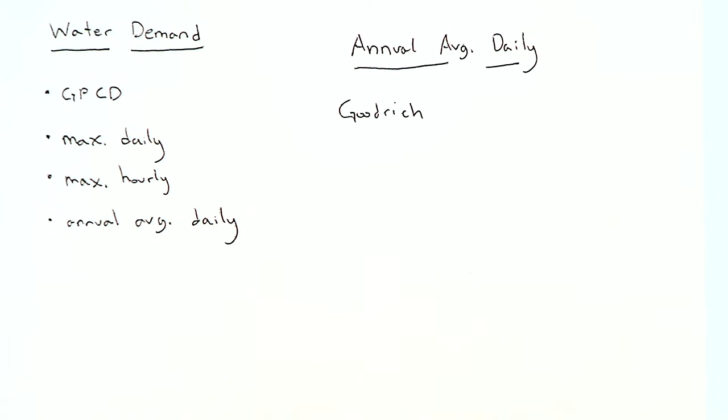For annual average daily demand, there's a very, very famous equation called the Goodrich equation, which is a very good estimate for maximum usage. Not for average, but for maximum usage. So the Goodrich equation tells me that the percentage of the annual average daily usage is equal to 180 divided by time in days to the 0.1.

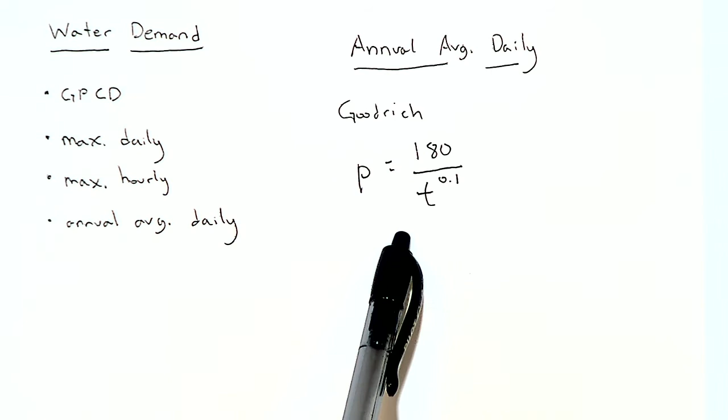What that means is that I can input a time. Let's say that I want to determine how much water is going to be used in 6 hours. I can input 6 hours here, and the number that I'm going to get is essentially going to be the percentage of what the average daily usage is. Okay. This equation is very helpful, and I would say it's very useful. I saw it when I was in college, and I also saw it again when I graduated and started working. So it is definitely an equation that is used.

Of course, you want to be careful. I've heard younger engineers say stuff like, oh, we can just figure that out with the Goodrich formula. And I think the wording there is a little bit incorrect. I would say we can estimate that with the Goodrich formula. We don't actually get real values, right? We just get estimates. Now this P is going to be a percentage, okay? Which means that the Goodrich formula really only helps us if we have a reasonable estimate of what the average use would be. And again, you can get that reasonable estimate with neighboring or similarly sized cities.

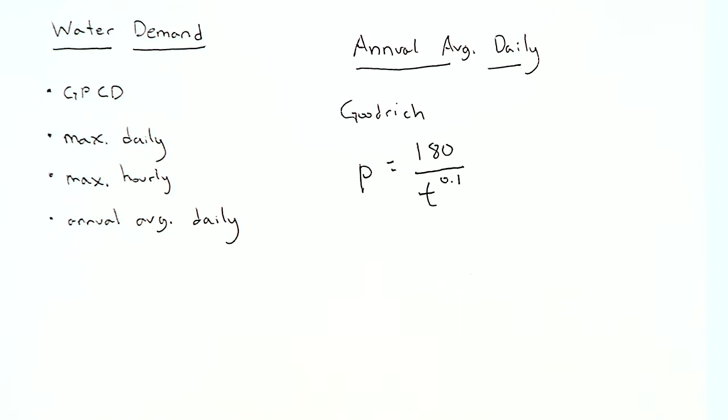The equation is valid from 2 hours all the way to 1 year. And by the way, sorry, T is time in days. I said hours earlier, it should be days. So the equation is valid from 2 hours all the way to 1 year. So 2 hours would be 2 out of 24 days, and 1 year would be 365 days. You want to be careful because this equation doesn't really account for firefighting needs. So that's a different thing, right? So typically the results that we get from this equation are for water that people consume, not necessarily for firefighting needs, but it's okay.

The maximum hourly usage can be compared to the maximum daily usage here. So for example, if I want to figure out what the daily usage would be, all I have to do is insert 1 day into this equation, and the daily usage is about 180% of the annual average use. So what this equation assumes is that the maximum daily usage is about 180%. So that's like 1.8 times what the average use would be.

I'm not really going to give you too many problems to work with this equation. I do want to try out some examples from the textbook just so we can get used to them. But I want you to be a little careful here because we're looking at a lot of statistical equations and a lot of estimates. These are not equations that I would recommend that you just take a number and punch it in without actually knowing what you are punching in. So we're going to do an example from the book, and hopefully that will give us enough math practice for this equation. But other than that example, related to this class, I would refrain from using it unless I tell you to. Okay? Because it is something that you want to be careful with.

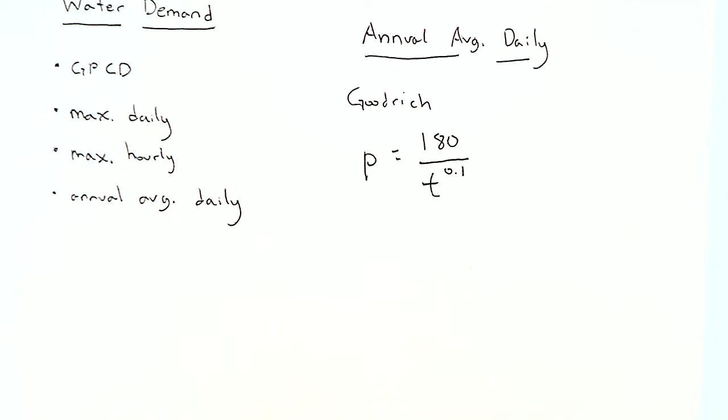I hate to sound lazy, but a lot of what we're going to learn does come with experience. So a lot of times we'll have 2 different methods, and I just won't be able to give you a list of reasons why this method is better than this one, unless it's definitive for one project. So for example, I have 2 methods. I can tell you which method would be best for one project. I can't really tell you which method would be best for all situations.

And unfortunately, a lot of that comes with experience. My experience is mostly in the stormwater side. On the sewage side, I do have water supply experience as well, mostly in urban areas, some rural experience. But if you're working on a project that's completely outside my scope of experience, I just won't be able to tell you, right? Because I don't know what that would look like. I could read about it, but I would rather actually tell you stuff that I know about instead of just read about it.

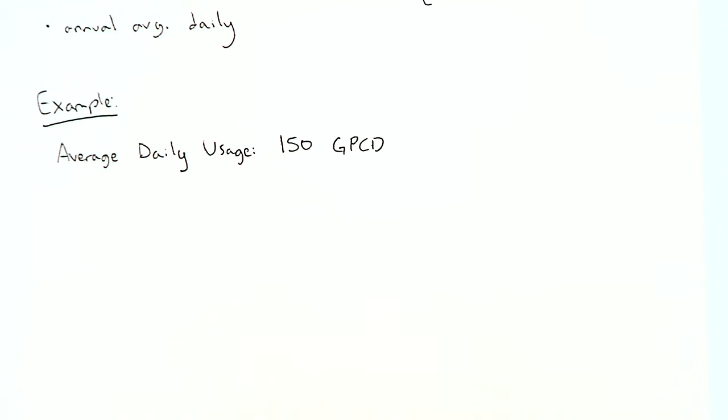All right, let's try an example. This is from the textbook. Let's say that the average daily water usage in a city is about 150 gallons per capita per day. And I would like to know what the maximum hourly demand in that city would be. I'm gonna give you some additional data. We find from statistical analysis that the maximum hourly usage is about 1.5 times the maximum daily usage.

That's what we found. So given that information, I would like to figure out what the maximum hourly demand is given an average daily usage of 150 gallons per capita per day. We don't have any data for this region, so we're gonna have to turn to some estimates. I would say let's go to the Goodrich formula to estimate. The Goodrich formula tells me the percentage, right, of the average daily, okay? So in this case, I write down my Goodrich formula.

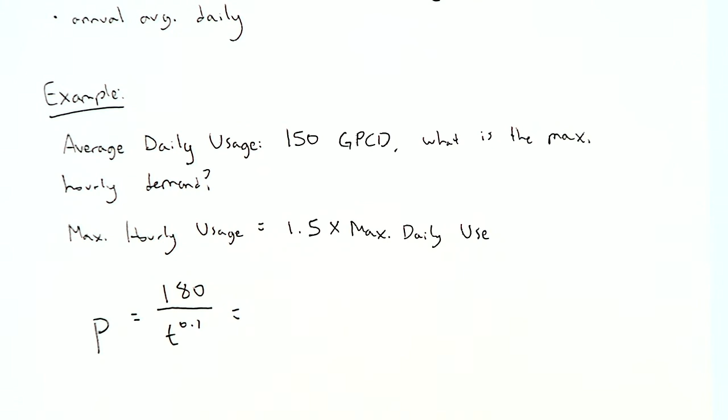And I am looking for maximum hourly demand, and I know that maximum hourly demand is 1.5 times the maximum daily demand. I can't find the hourly demand here because remember, this is only valid from 2 hours and up, right? It's not valid for less than 2 hours. But I can find the maximum daily demand. So then, what would I input here if time is in days? Okay. So what does this give me?

180. Okay. What this tells me is that the maximum daily use is 180%, right, of the annual average use. That means that the maximum daily use is going to be 180%, that's just 1.8, times the average daily use, which is 150 gallons per capita per day. Punch that into your calculator. That should give you a maximum daily use of 270 gallons per capita per day.

And from our previous knowledge, we know that the maximum hourly use is about 150% of the maximum daily use. So that's 1.5 times my 270 gallons per capita per day. Punching that into your calculator would give you a maximum hourly use of 405 gallons per capita per day. Remember, this is gallons, that's volume. Person is just person. And then day is time. So this is actually a flow rate, right? It's volume over time. Okay.

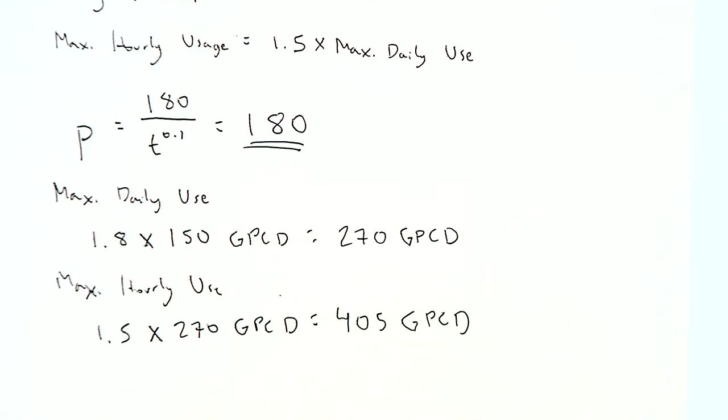Go ahead. So would you have to increase the pressure in the system to account for it? The thing is that obviously you can't just increase the pressure at a certain time, right? You need to design for that pressure entirely, and that's correct. I think you bring up a good point that I'd like to talk about. You have a building that's 10 stories high. Of course, you're going to have to design so that your water pressure can reach all 10 stories because you have taps and bathrooms on all 10 stories.

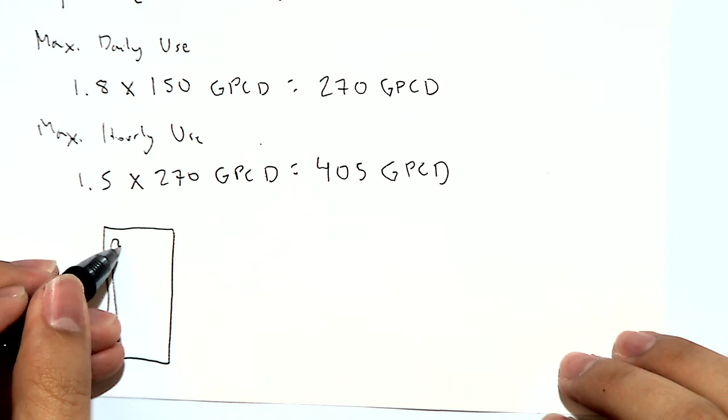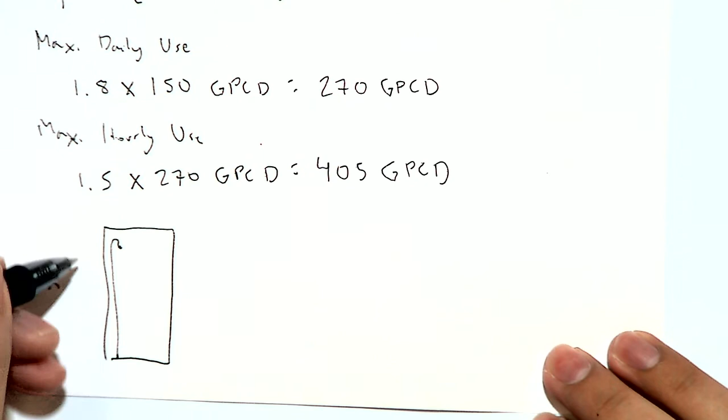You may recall from fluid mechanics that we have a hydrostatic pressure equation, and we know that pressure is just gamma H. So if you know the H, you multiply that by 62.4 if you're in English units, and you figure out the pressure needed to take water all the way up to this point. Now there's a little bit more that you need to do. You need to consider energy losses, friction losses, and you do that with the energy equation, which we've already covered in fluids. However, as long as you can get water up to that point with a certain additional pressure, you should be fine.

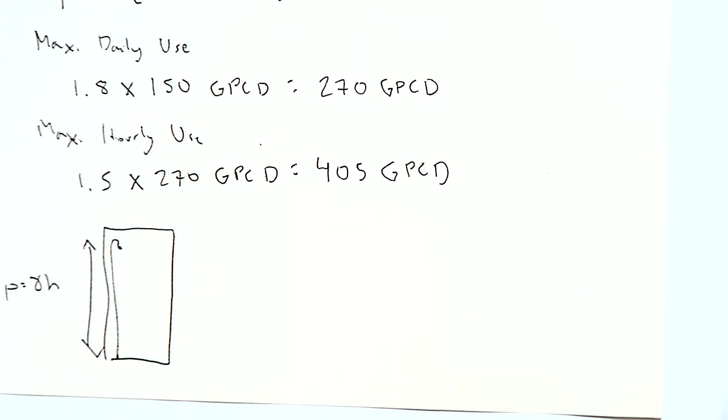Here's the problem. When it comes to fire demand, you're going to have to get water up to that point in much larger volumes than your tap water would be, which means that the pressure you need to design for is actually going to be larger. Now I'm going to go back to your point. I designed for a really large pressure so that I can convey the required flow rate up to the point I want. What happens if I go too high on my pressure? What happens to my plumbing system? It can burst, right?

So I also need to make sure that my pressure does not overwhelm my plumbing system. Most cities don't have the luxury of having a separate water supply and firefighting system. They're all part of the same system. So we need to design our system in such a way that we provide the appropriate pressure without overwhelming the plumbing system of a building.

When I was in college, we did this project for a class where we were given kind of like a neighborhood, and we had to do all these different designs: pressurized systems, tap water, firefighting water, all these different things. And I remember that one of the things that really got us when we were working in teams on this project was trying to come up with a good design for a firefighting system that wouldn't actually make your pipes burst.

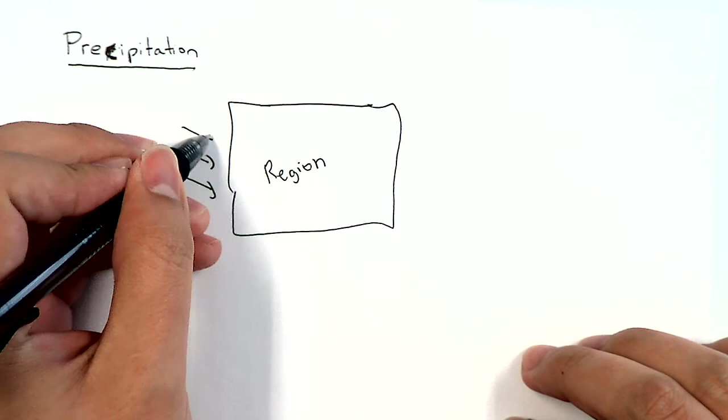We're going to have our region, and we are going to have some influx of flow. Where do you think this influx comes from? Let's say you're studying a region, let's say you're studying Marietta. Where does the influx of water come from? Rain. Good. We have rain. Within the region, rain can take many forms. Surface water, groundwater, we can capture it, we can move it around, we can use it, but it comes to

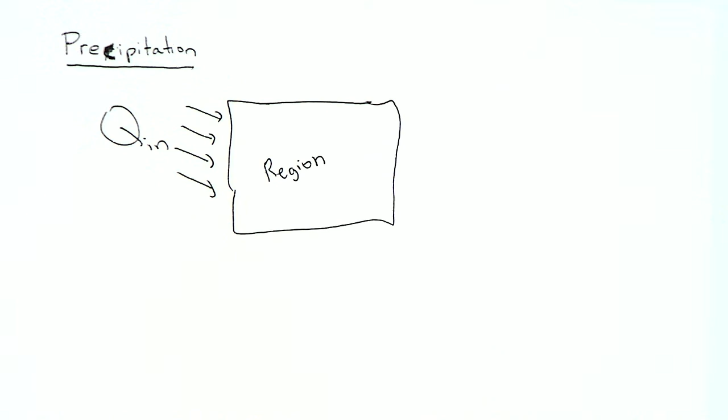us as rain. The Chattahoochee River passes through a lot of cities. One of those cities is Sandy Springs. Now, we typically don't use that section of the Chattahoochee for water supply, but let's just say we did for a second. In that case, we would have an influx from rain, but also another influx from the Chattahoochee River, which collects rain that falls outside of the region and brings it into our region. Okay, so there are different sources of influx and inflow.

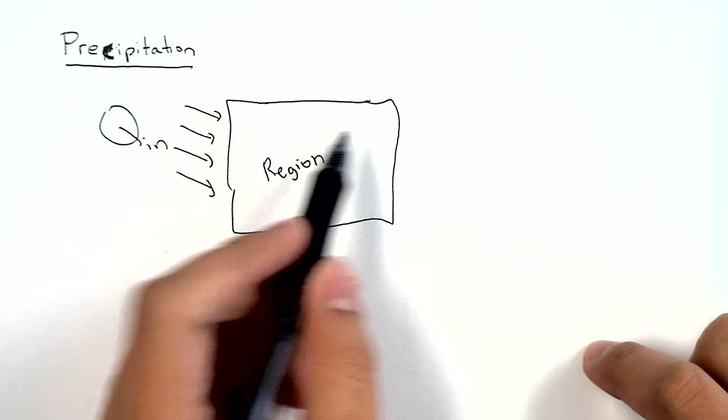But the important thing is that if we study our control volume, we can say, well, water can come in, which means that it increases our supply in the region, and then water leaves. It leaves to the city, it leaves to the houses, it leaves to the people that are using them, it leaves for many reasons, okay? And of course, if we look at this in the form of a control volume, we know that as long as the influx is greater than our outflux, we won't have any water needs, right? We'll be able to meet our demands.

All right, so if Q in is greater than Q out, we won't have any needs, we'd be okay. If Q in is smaller than Q out, we have problems, right? We're gonna have a need of water.

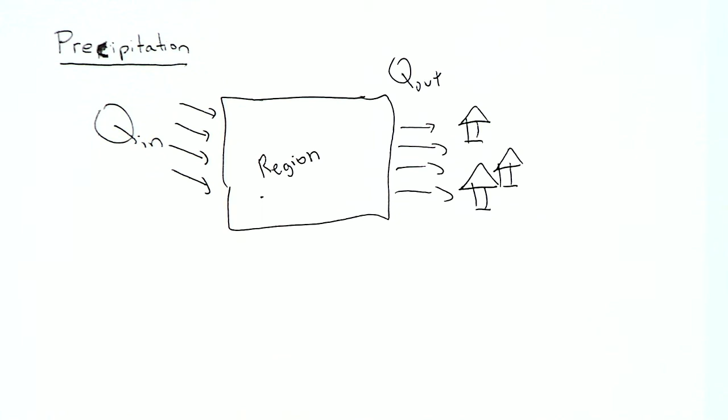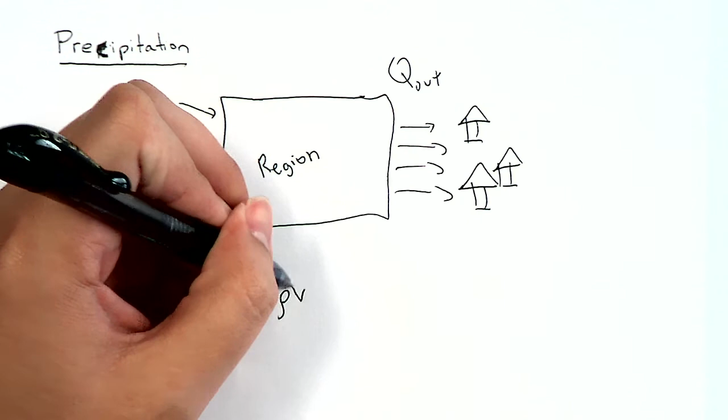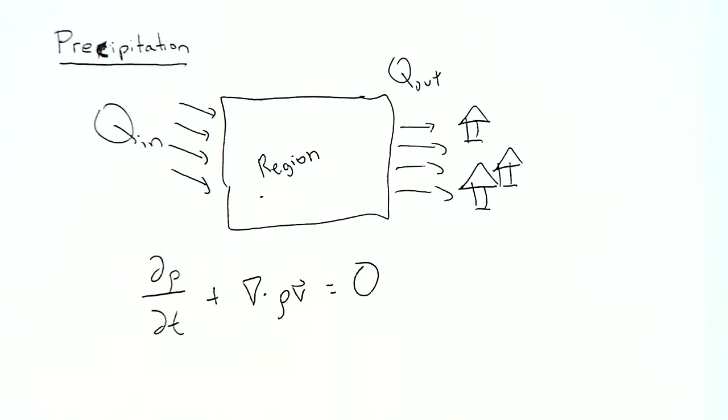In order to study how much water is actually in a region, we're gonna have to apply the continuity equation. You may recall this with a little bit of fear, but this was the continuity equation that we studied in class. What that equation told us is that essentially what comes in must come out, and if it doesn't, that means that the density of the fluid is changing. Now, this is a hydrology class, which means that we're going to take this continuity equation and we're going to apply it to water.

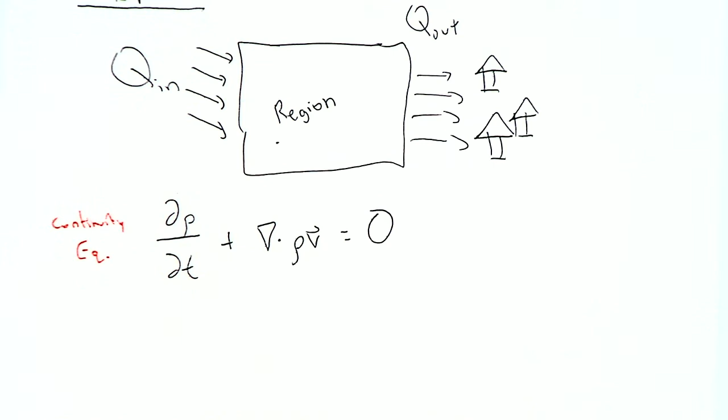Josh, I'm going to have to use you again. When it comes to water, which is a liquid, what can we say about the density of liquids? Or specifically about the change in density in liquids? That for the most part it does not change. Exactly, right? When we're dealing with liquids, normally, unless we're looking at massive temperature changes, our densities will not change. So if my density doesn't change, then what's the derivative with respect to time? Zero. Good.

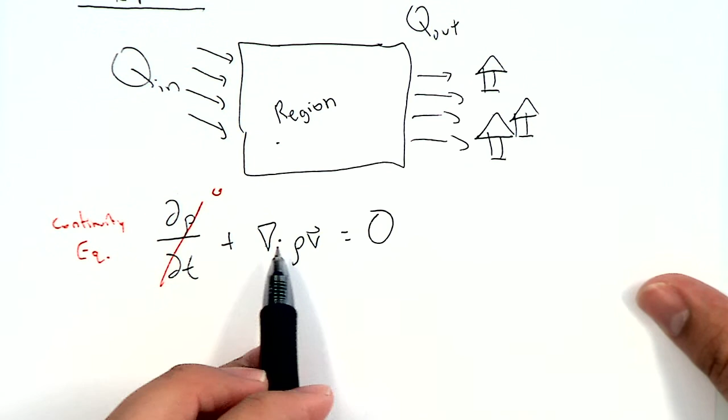Also, if my density doesn't change, then I can take it out, right? It's a constant. I can take it out of this divergence. And then I end up with this nice little simplified form of the continuity equation.

eyes and expressions. Yes? What does the upside down triangle mean? It's a Nabla operator. So it's a gradient operator. It just gives you the derivative with respect to all spatial dimensions. Now here's a good part for all of you. We won't have to deal with the equation in this way in this class. We're actually going to keep simplifying it until we get to something a little bit easier. Okay?

Yeah. Okay, good. All this tells me is that the derivative of u with respect to x, you don't have to write this, I'm just going to show you the derivatives are equal to 0. And what we can get from this, and that's the important part, is that if the density doesn't change, and these derivatives don't really change because my volume doesn't change, then we can simplify this expression into a form that tells me that the flow rate in minus the flow rate out will equal whatever the change in volume in our system is.

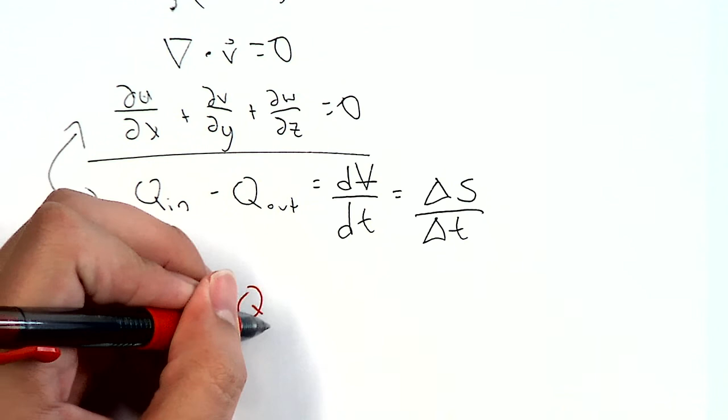I don't know what the variable will be for that, because normally most water balance equations don't include it. But you do bring a good point. When you have places with drought, you have to actually bring water from other regions. So we can call it whatever you want. I'll just call it QT. But, you know, it's just not in the water balance equation.

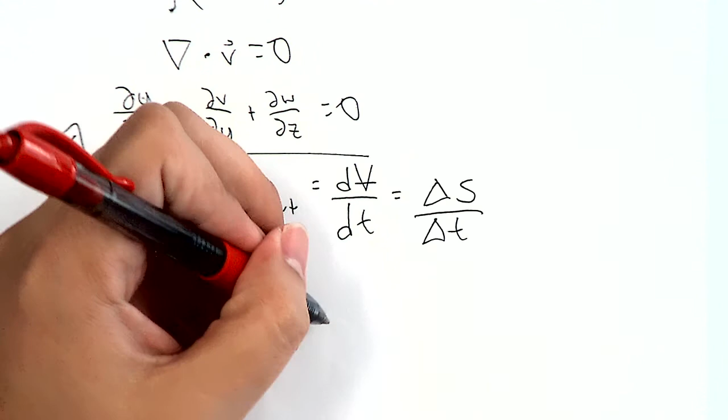Good. Any other sources of inflow? We said that water can come in through rivers. In addition to surface water, what other types of water did we have? Groundwater. Okay, so we can actually have water come into our region under the ground, right? Good. So we have groundwater inflow into our region. I think those are good sources. Precipitation, surface water inflow, groundwater inflow, and then water that is transported into our region.

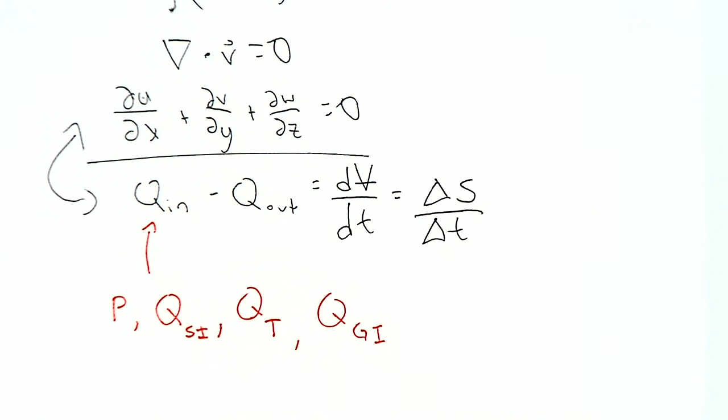What do you think are sources of outflow? So that was inflow. Now let's look at outflow. Evaporation. Can you say it again? Evaporation, good. And let's call this surface water evaporation. Okay. Yeah, can you say that again? Somebody said something. Residential. Okay, so usage, right? Just water that we use.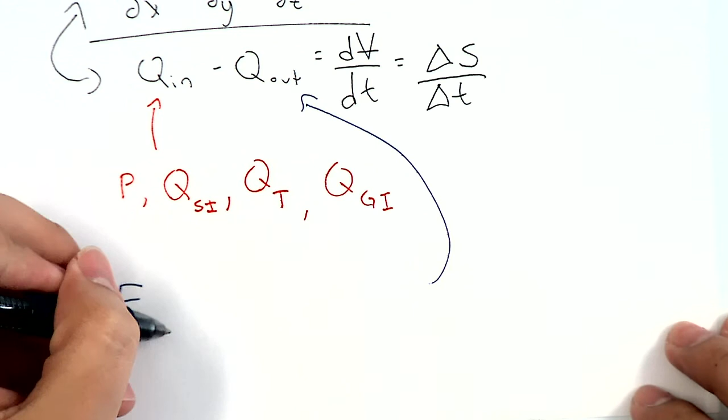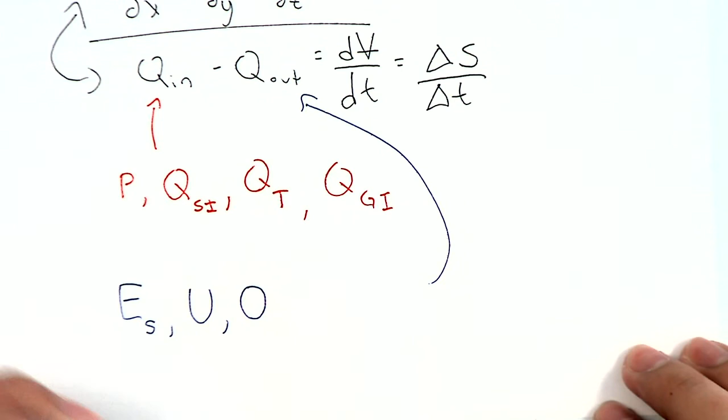And again, we can call this U for usage, we can call it whatever. These variables, every single book has different variables. So don't take these as this is the variable, okay? Really what matters is the concept, not the letters themselves. But anyway, usage. We have evaporation, water can evaporate, or we can use water, okay? Any other? You have outflow of surface water and groundwater too. Exactly, so we have outflow, so we can call it QSO, I think.

Yeah, surface outflow, good. Is water on the surface the only way it can leave our region? Groundwater. Groundwater outflow, good. Infiltration, good. Water can infiltrate as well, leaving our region by just joining the groundwater, okay? We're missing one. What are other ways that water can leave our region and go back into the atmosphere? Did we say the plant one? Transpiration, good. Evapotranspiration, good. Awesome.

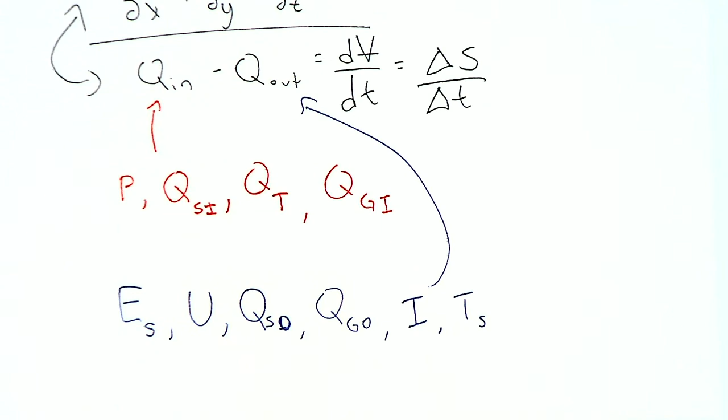So here's the thing. We started with this very complicated continuity equation, a nice nonlinear differential equation that we can solve. And now we're going to simplify it into a nice arithmetic equation where all we have to do is add and subtract things. Conceptually speaking, we're saying that the change in storage, and let's multiply everything with respect to time, is going to be equal to the precipitation plus the surface water inflow plus the transported water plus groundwater inflow

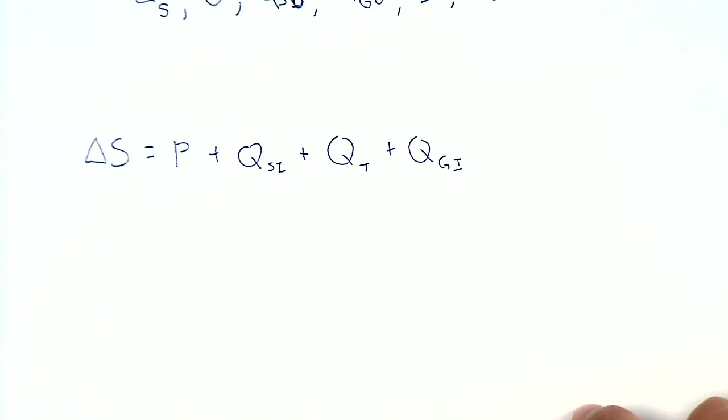minus evaporated water minus used water minus surface water outflow minus groundwater outflow minus infiltration minus transpiration. Again, these are not variables in the mathematical sense. We're talking about concepts here. We're talking about the concept of precipitation that adds to storage or removes storage.

If you ever want to use this and actually add numbers to it, then of course you need to make sure that your units match. Right now the units don't match here because I would have to add delta T to every single one of these. It's just a little bit too much. So in terms of concepts, if we understand how much water is coming in and how much is leaving, then we will know how our storage changes. If we know how our storage changes, then we know the state of our water supply system. That's called the water balance equation.

What time does this class end? 1:30? Okay, so we have enough time.

Let's go to example 2.1. It's a very simple water balance equation. And it's going to force us to deal with units as well. That's why I like this example.

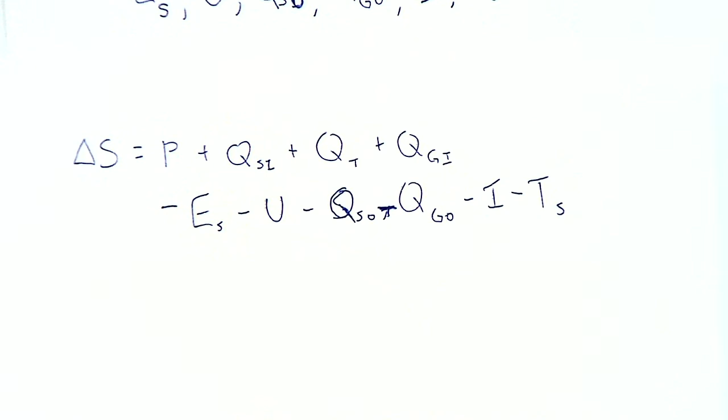All right, reading from the book. At a particular time, the storage in a river reach, a reach is just a section of a river, is 55.3 acre feet. And this is something really interesting. You always want to keep in mind that hydrologists are notorious for coming up with our own units that just benefit ourselves. So the storage is going to be 55.3 acre feet.

What is this, dimensionally speaking, in terms of dimensions? Is this an area or a volume? Volume. It's a volume, right? Because we have area multiplied by length, it's a volume. Of course, we could convert it into cubic feet.

Why acre feet? Why not just do feet cubed? I'll explain. So typically, you have big areas for regions, which are typically measured in acres, right? 1 acre, 43,560 square feet for a given depth. But then you want to measure that in terms of depth as well. So normally the acre stands for your entire area, and then your depth is just whatever.

When we talk about rainfall, sometimes I talk about it in inches acre, right? So I say, well, for every acre, there was however many inches of water rainfall. So it's just a way to kind of help us talk about things. But yeah, acre feet. And like I said, I like this problem. It's going to force you to deal with these units, okay?

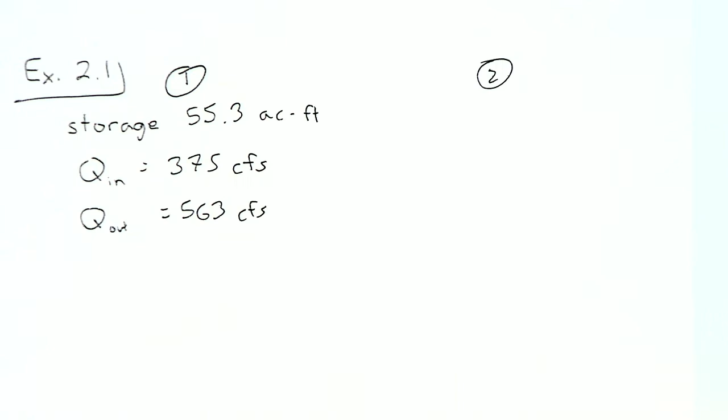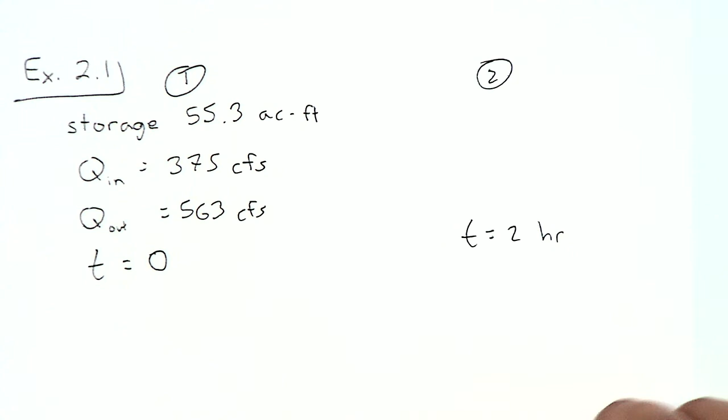And we'll say that at that same instant, the outflow is 563 cubic feet per second. Okay, that's at one instant. Let's call this state number 1. At some instant in state number 2, 2 hours later, so we can call this time 0, and we can say this time 2 hours later. At some point, the inflow and outflow are 600 for inflow, and the outflow is 675.

I would like to know what the storage is at that point. So I'd like to know how much the storage changed and what the storage is. There are obviously problems with how much data was given, which means that we're going to have to come up with some assumptions to work with that. But let's see if you can figure those out before I tell you what they are. So how would we solve this? First of all, storage is volume, but then we're given inflow and outflow in volume over time, which is flow rate. Okay, how do we know how much storage is being added?

You need to convert the cubic feet. We can do that. We can convert to cubic feet just to make things easier for us. So Jaden says let's convert to cubic feet. So our storage, I'm going to call it storage at state 1, is going to be 55.3 acre feet. There are 43,560 square feet in an acre. And if you work in hydrology, you're going to memorize that number really quickly because you're going to use it all the time. So I can say there are 43,560 feet squared per acre.

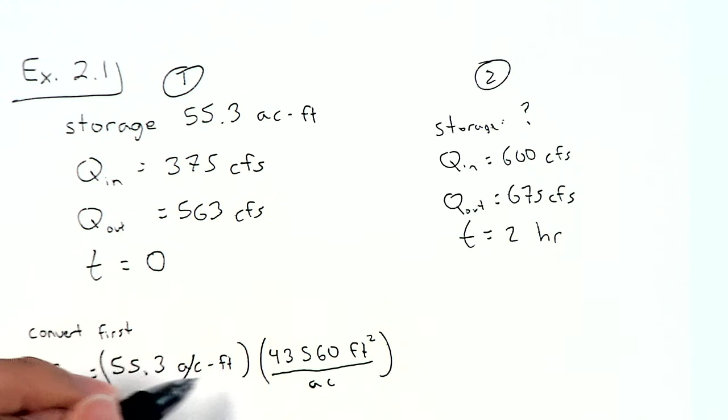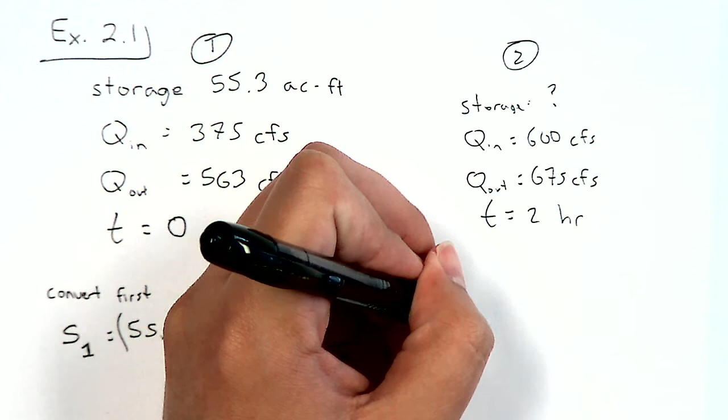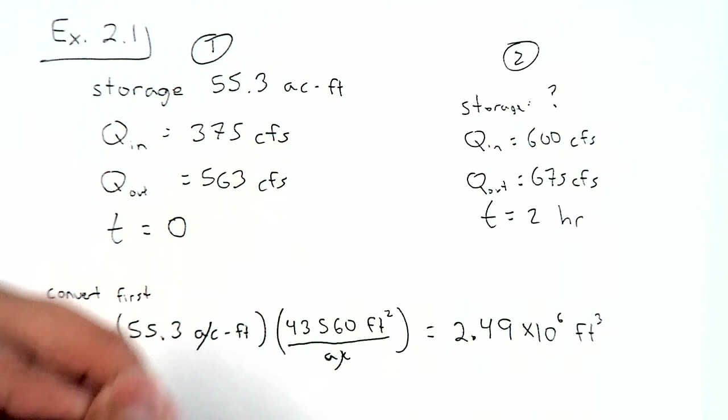How many cubic feet of storage do we have? 2,424,088,000. No, it was 2.4 million. 2.4 million? 2.49 million? Yeah, I didn't put commas in here, so I don't know. Somebody tell me the storage. 2,408,868. All right, 2.49 million, right? 41. 41. That's why you don't use cubic feet.

Yep, I hope that answered your question, Seth. Good. Awesome. So what does this tell us right now? Just let's look at state number 1 at time 0. What do we know about the storage in that river at that time? It's decreasing. Why is it decreasing? Because our out is way bigger than our in. Exactly, right? We have more water leaving our system than we have entering our system.

What about state number 2? What do we know about state number 2? It's not decreasing as much though. It's decreasing, maybe not as much. Would you expect your storage at time 2 hours to be lower than the storage at time 0 then?

Okay. Now we have a problem here. We only have two measurements. Inflow and outflow at 0, inflow and outflow at 2 hours. We don't know what happens in between. So what assumptions can we take? Could we assume that the inflow and outflow is going to be this for the entire 2 hours and then right at 2 hours switches to this? Is that a good assumption?

Why not? I believe you. I just want to know why. Why isn't it a good assumption? Realistically, it doesn't really happen, right? Okay, yeah, not very realistic. Okay, could we assume that for the first hour, this is my inflow and outflow, and then for the second hour, this is my inflow and outflow? It just changes drastically like that? Not very realistic either, right? Any ideas on what we could assume?

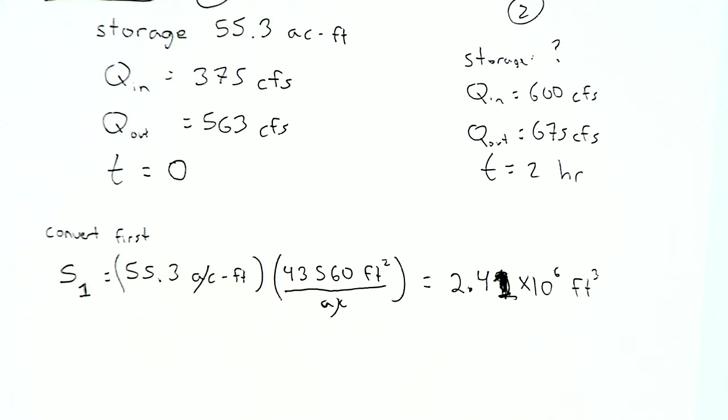So it's linear. Okay, we could assume that the inflow increases linearly to 600 CFS, and at the same time, the outflow increases linearly to 675. That's an okay assumption. And for this case, unless we have any statistical data to use, it's the best assumption. We could have better assumptions if we had more data that could point us towards that trend. But right now, we don't.

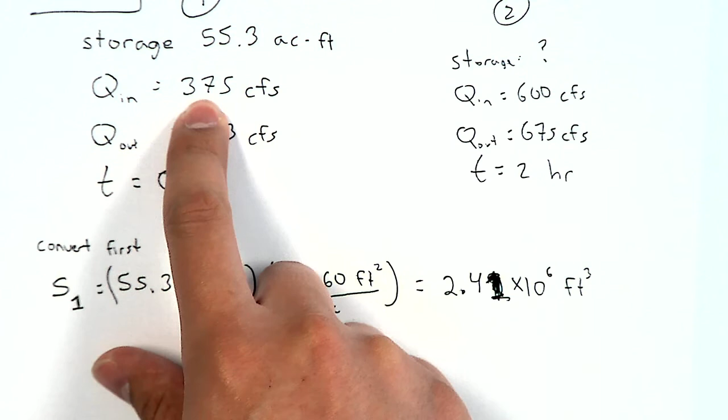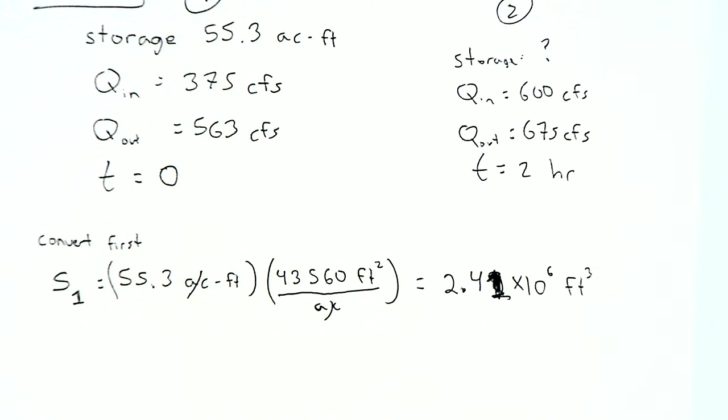So we do know how this flow rate changes. We know that inflow increases linearly from 375 to 600 CFS over the course of 2 hours. We know that outflow increases linearly from 563 to 675. I don't know why they couldn't just use round numbers. But anyway, 563 to 675 linearly over the course of 2 hours. Using just that information, can we find the change in storage, knowing how the inflow changes and knowing what the initial storage was? Yes. Yeah, let's figure that out.

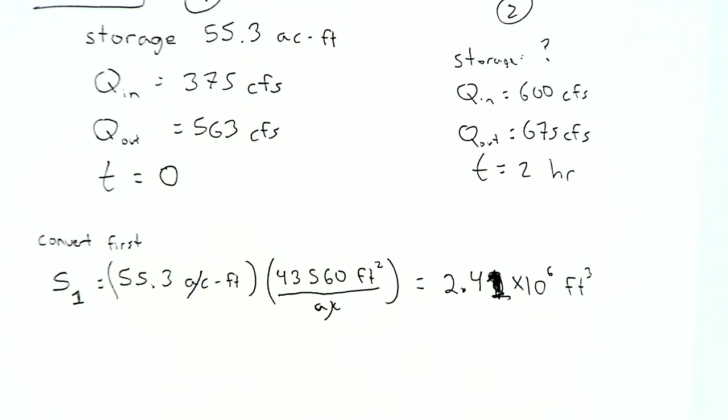So there are two ways we can solve this. We can integrate, right? We can just come up with a nice equation for inflow, which is just a linear equation, and integrate that over the course of 2 hours and get the total storage volume that's added. We do the same thing for outflow and get the total storage that's removed, and then we just add everything up. That's one way to solve this.

A second way to solve this, and maybe geometrically is a better way to look at it, is to say this is my inflow, and I'm going to plot it here. This is time, and this is Q in. We start at 375. We increase linearly over the course of 2 hours to 600. What happens if I integrate the flow rate curve right now? What does that give me?

The change in storage? Yeah, right? Because flow rate is volume over time. You integrate that, right? That gives you volume. I think we understand how integrals work here, right? Good. If we don't, I'm giving a math course next week during my office hours and will cover all those things.

So that means that the area under this curve, this trapezoid, gives me the amount of storage that is added to my system. Can we agree on that? Given that information, can we find that area under the trapezoid? Yeah. Okay, let's find it. What's the area of a trapezoid? It's the average of the two heights, multiplied by the base. All right, let's figure that out.

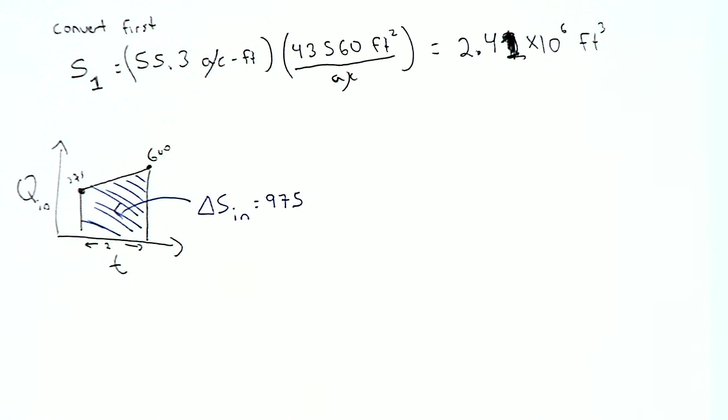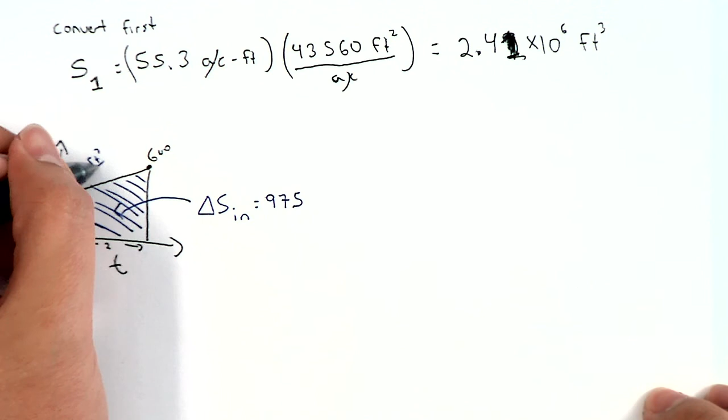975, right? All right. Yeah. And what units does this give me then? Let's look at units. What are the units of this flow rate? CFS. What's that? Cubic feet per second, right? We're multiplying it times what? What are the units of time? Oh. Okay. So what is our storage really, once we fix the units?

Nash, 4 classes with me. I'm disappointed in you. But it's okay. Well, you didn't write units on your graph, so technically. Oh yeah, try to blame me, huh? You gotta play it that way.

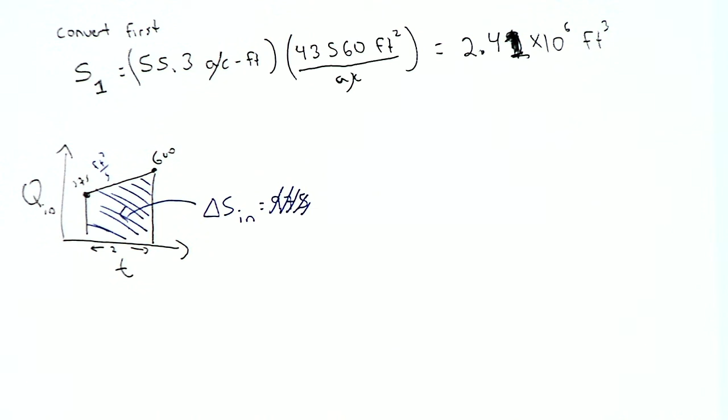The book also does this, but then the book takes a nice approach. It writes the units as CFS times hour, which is totally right. Yeah, give me the storage, okay? Is it 3.51 times 10 raised to 6? Okay, thank you. 3.51 times 10 to the 6th. Like that? All right, can somebody confirm? That's what I got. Perfect, good.

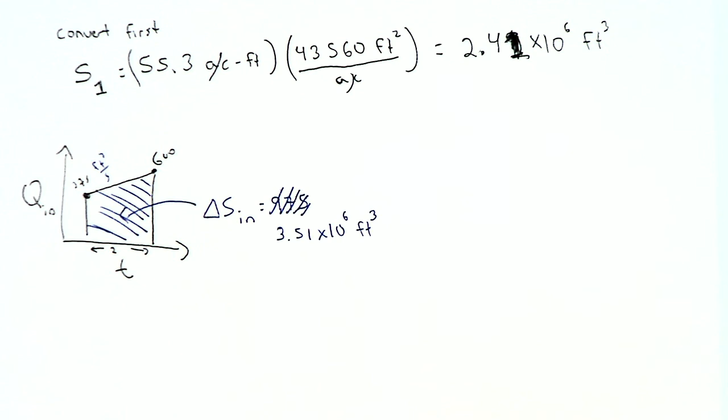So we found the storage in. Now we can go ahead and find the storage out. The outflow starts at 563. Let me write the units so Nash doesn't complain. And it increases to 675. And that is over the course of 2 hours. The area under this curve is going to give me the total volume that leaves my system.

.46. 4.4 what? 46. Thank you. Times 10 to the 6th? Yeah. Thank you. Somebody confirm that value, please? Yeah. That's right. Perfect. Finally, we go to our final question. What is the storage at 2 hours?

Conceptually speaking, what would I write here? Not the numbers, but the concept. What would this be? How do we get the storage at 2 hours? S at 2 hours minus... The main storage minus. Okay, minus main storage, okay. Plus Q in minus Q out. Q, Q, or, oh, delta? I'm sorry, yeah, that. Okay. Minus delta S out. Good. You punch those numbers in, and you should get your total storage.

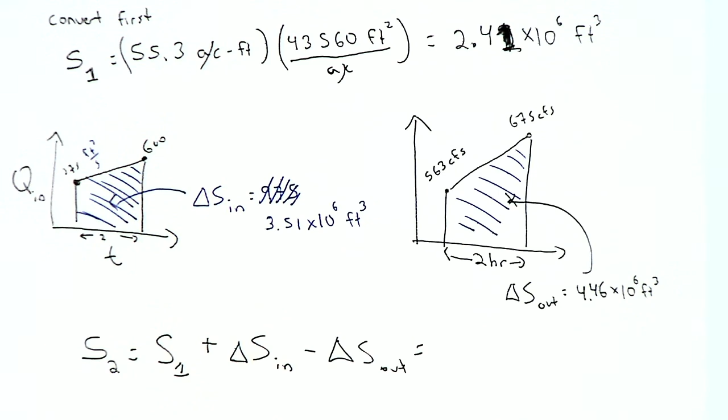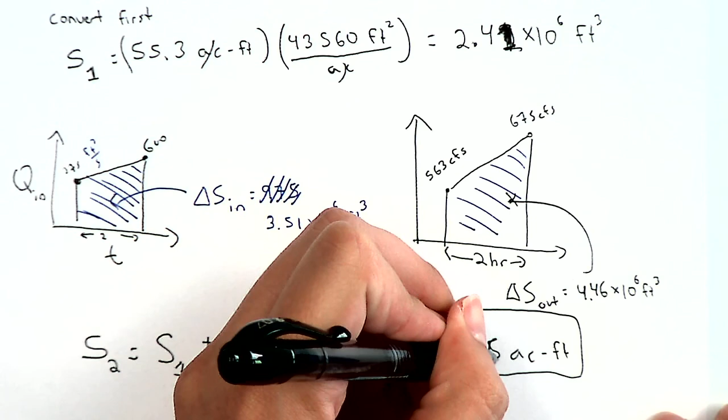And just to give you a little bit of extra work, give me that storage in acre-feet so that we can check with the book. So get your number, divide by 43,560. 33.5. Perfect. Can somebody confirm that value? Yeah, I would have rounded up, but yeah. 6. Okay. Good. Any questions?

See, we need to sometimes come up with different ways to solve this. I think graphically it works best for me because I love geometry. If you don't love geometry, you could have just integrated that and you would have landed at the same answer, okay? Because integrating is just finding the area under the curve. The book solves the same problem with a different process, so you can also look at the book's process. What the book does is just average everything. Could also work, but only when there's linear relationships. So that's why I didn't want to use it in class, because it will not apply to every single scenario.

Any other questions with the topic of water balance? Oh, sorry, go ahead. How do we go from the 975 to the 3.51? I'm sorry. Oh, how do we go from this to this? It's units. So we got this 975 by taking this area, which has dimensions of CFS and hours, which means it's 975 cubic feet per second times hour. So all we do to go from here to here is look at how many seconds are in 2 hours, basically. So that we can have cubic feet divided by second, multiplied by second, so the seconds cancel out.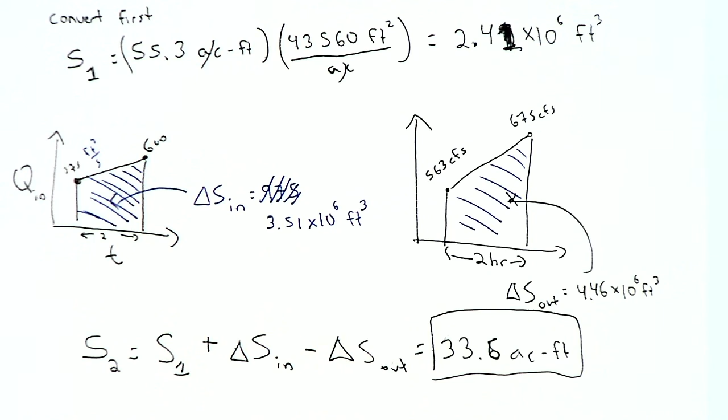Before I let you go, I do want to talk a little bit more about precipitation because we will start on Thursday. We will get to do some work on Thursday. I do want you to get ready for it a little bit. So when it comes to precipitation, I'm not gonna write anything, let's just discuss. When it comes to precipitation, we can't estimate or calculate it with any certainty, right? All meteorological models are estimates. We can think of the probability of rainfall, we can't really say it's gonna rain definitively, okay? So when it comes to precipitation, we typically rely a lot on measured data. As hydrologists, as water resource engineers, we're gonna rely a lot on measured precipitation data.

Does anybody have any idea how precipitation is measured? Inches per hour? Yeah, the units, but like how? Oh. Usually collecting it. Yeah, you collect it, right? You collect and you figure out how much it rained in a certain amount of time, okay? So let's keep that in mind, because we're gonna use data, but just because data was collected at one site doesn't mean that I'm gonna design right there.

Maybe I'm designing a structure here, even though the nearest rainfall collection was half a mile away. And then I have to make a decision, like, how can I estimate or convert the measurements that I got half a mile away to the measurements that I should get here? We don't have time or budget to collect rainfall every time we design a project. So we rely a lot on existing measurements, and we have to find methods to bring those measurements and apply them into our area. We're gonna talk about those methods on Thursday, so I'll see you then.